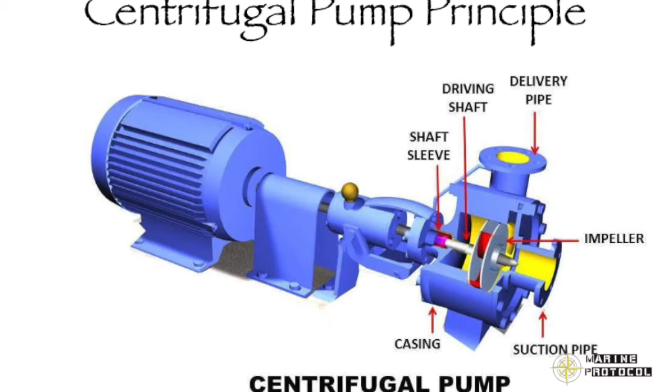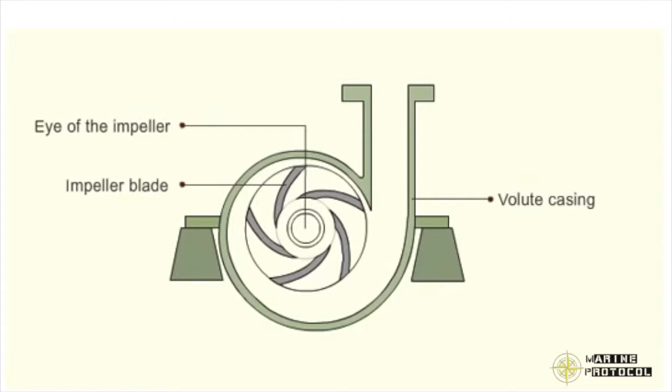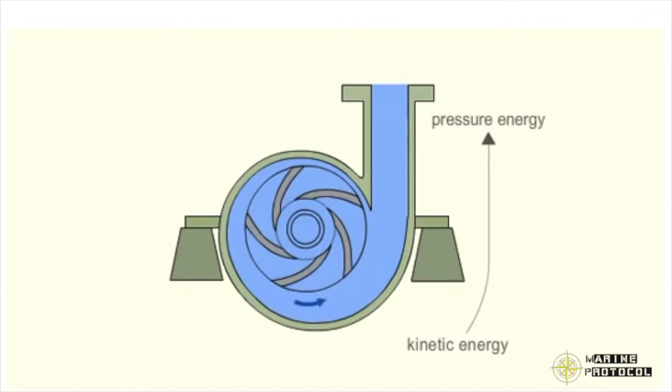The centrifugal pump has a volute-type casing. Liquid drawn from the eye gains kinetic energy from the rotating impeller. The curvature of the volute converts this kinetic energy into pressure energy along the casing walls.

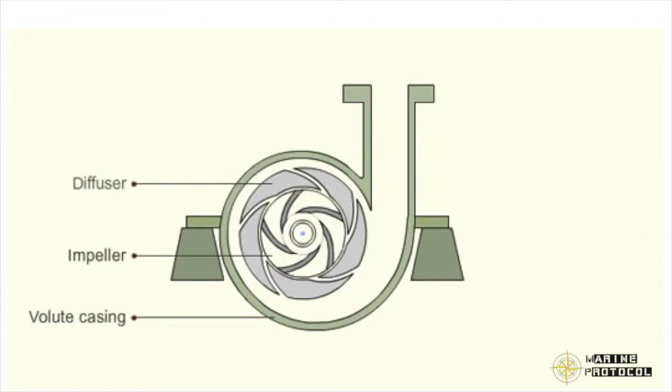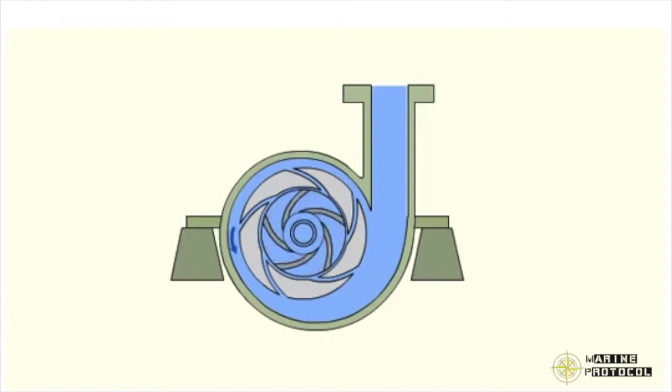In order to increase the pressure of the fluid, a set of fixed vanes called diffuser is fitted inside the casing of centrifugal pumps. The rotating body is in the center, surrounded by fixed diffuser blades. The impeller directs the liquid into the fixed diffuser blades, where there is a slight drop in the velocity of liquid. This drop in velocity is compensated by an increase in the pressure of the fluid.

As these pumps are not self-priming, they require a primer to remove air from the suction pipe. You can see a water ring primer coupled to an electric motor and centrifugal pump set.

The centrifugal pump suction pipe is fitted with a float chamber. The float operates a valve on the pipe connecting the float chamber and the air pump suction. When there is no liquid in the suction pipe, the float drops and the valve opens. A bronze spring holds the float.

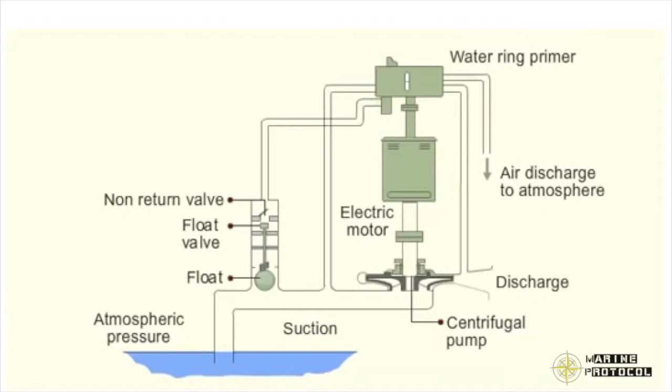Air in the suction pipe is removed by the primer and pumped out into the atmosphere. The partial vacuum created by this evacuation causes the atmospheric pressure to force the liquid into the suction pipe. The rising liquid will lift the float and close the valve.

A pipe from the centrifugal pump outlet provides cooling water to the primer. This cooling water returns to the pump suction through another pipe.

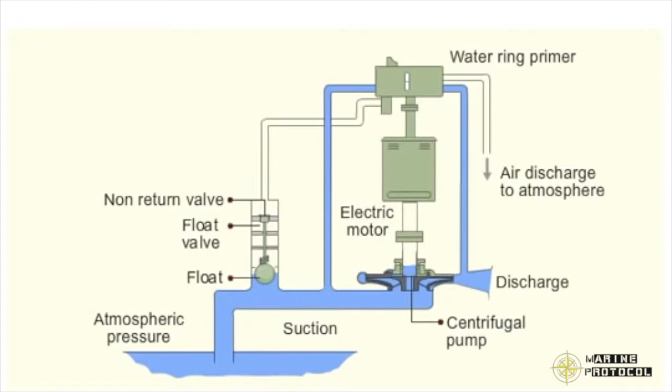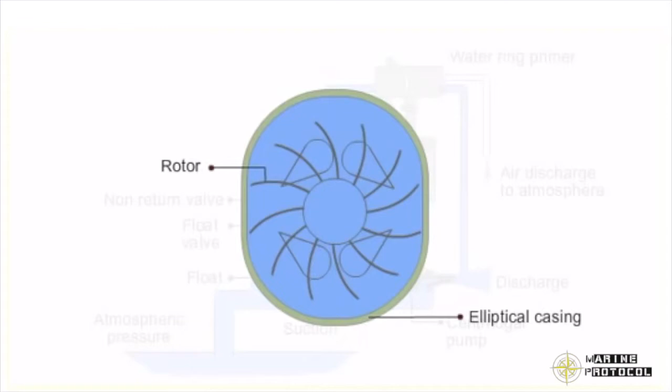To understand how air is removed by the air pump, have a look at the cross-sectional view of the water ring primer. The air pump consists of an elliptical casing with a vaned rotor and cover plate with suction and discharge ports. The casing is partially filled with water.

When the pump is running, the water flows along the periphery of the casing due to the centrifugal force imparted to it by the rotor, creating a water ring.

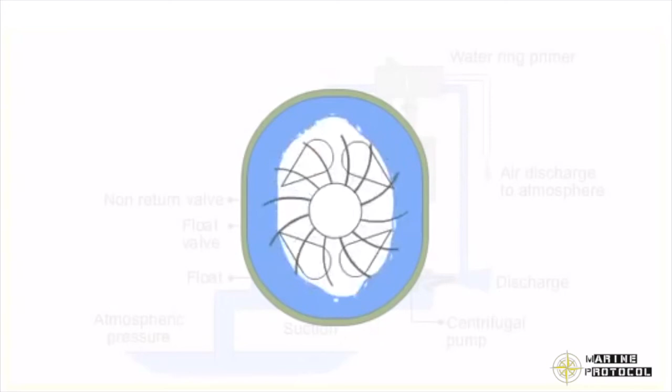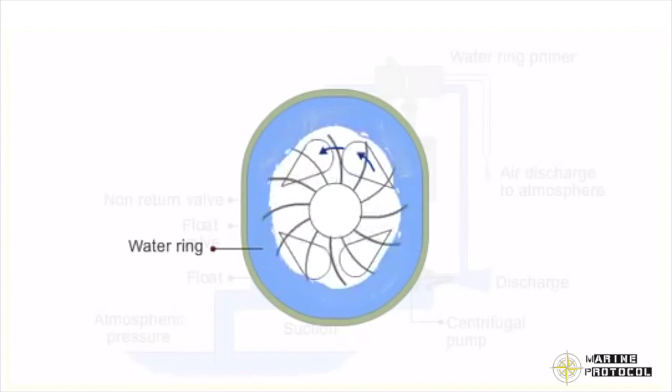As the rotor vanes pass the suction port, air in the suction pipe is drawn in and trapped between the water ring and the pump shaft. This slug of air is carried around and delivered to the discharge port, from where the air is discharged into the atmosphere.